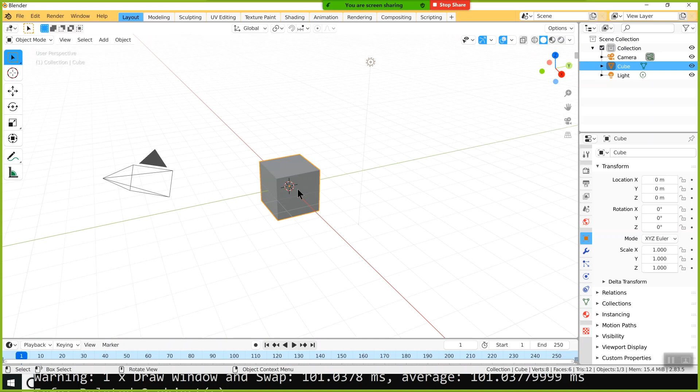Okay, so I got a cube here. I'm going to do an S for scale. Make it a little bigger that way. I'm going to scale along the y-axis. So I'll do S, Y. That way, viewport. Display as wire, so I can see through it. Okay. Now, I'll go to the physics. And this is the part that's changed a little bit.

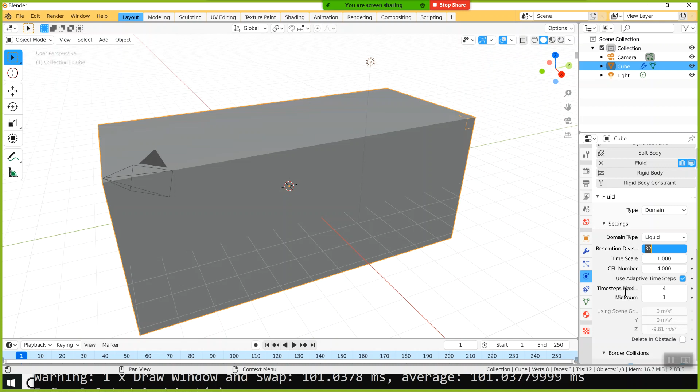Here I click fluid, and that'll add the fluid. And the type, I can do a drop down here. And you see I got domain, flow, effector. I'll choose domain. I'll change the domain type to liquid. And some of these resolutions, I'll talk about those. That make it look better, and so forth. Boy, I changed my viewport back.

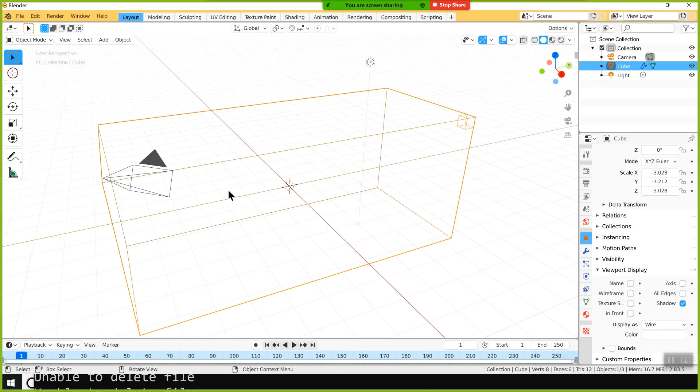Now, a domain is what's going to contain your water. So your animation is going along. Maybe the water is in an ocean. This would be the big box around the ocean. So your water wouldn't flow all over the place. You can think of it along those principles. Now within that, I need to have a water source. And so you add another object.

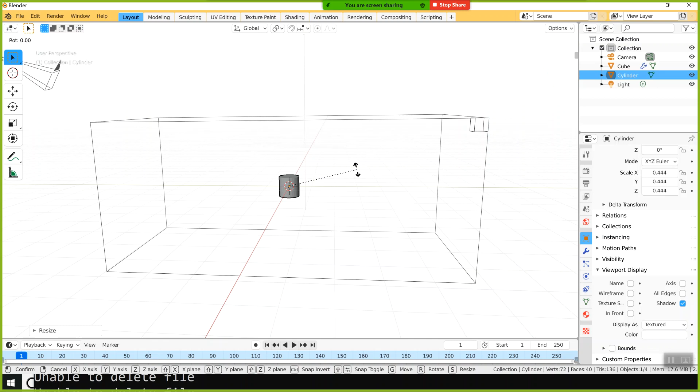Okay, cylinder, I guess. That's smaller. Rotated about the x-axis, I guess. So RX 90. Do a GY to move it along the y-axis. Do a GZ, move it along the z-axis. Okay.

And now if I go to the physics button here, if I choose fluid and choose type, see how there's a flow? This is water flowing in and water flowing out. Flow type, let's choose liquid again. If I choose flow behavior, see there's geometry, but there's inflow and outflow. I choose inflow. And this is where our water will flow in.

Now you have to tell where it's flowing in from. See the flow source, you can choose mesh or some other, no, there's only mesh. You can set your velocity.

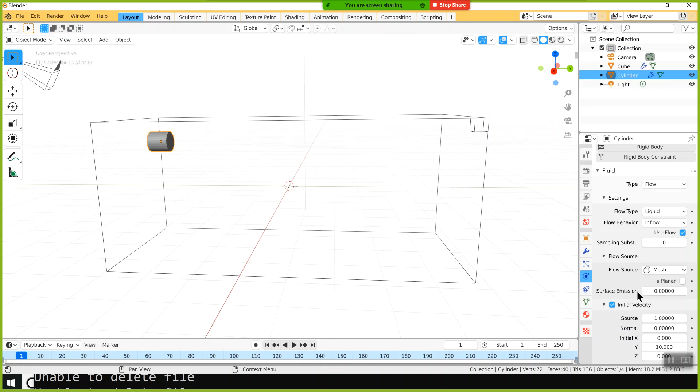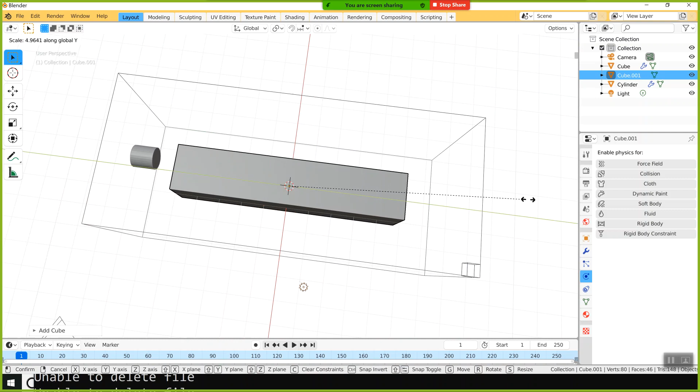Let's see, is outflow obstacle. Drop another cube in here. Add mesh cube. We'll do an SY, I guess. Change it on that. SX.

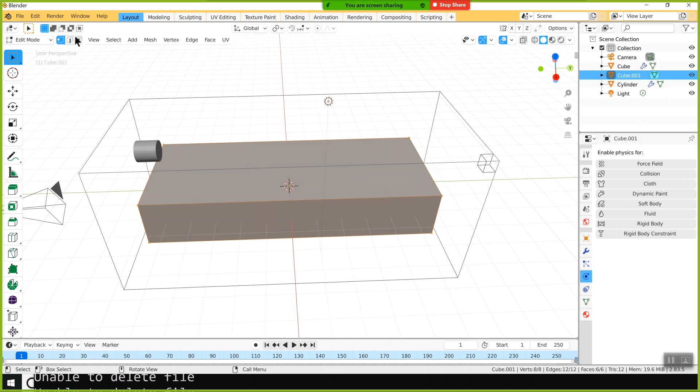Okay, and then I'll go into edit mode, choose face select, choose the top face and press delete, and choose which one? I think vertices. No, I was wrong. Control Z. Let's see. X. How about face? Okay, face.

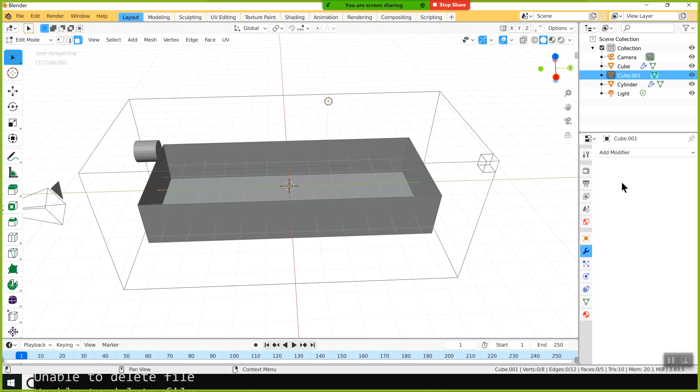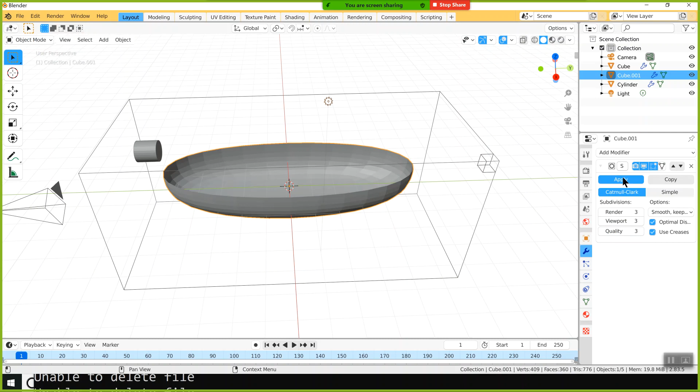Now there's a, and I talk about it in the video, there's an add modifier where you can do a which one? Subdivision surface, I believe. Maybe thinking of a different one, but that'd probably work. Then if I click apply here, yeah, maybe that'd be in object mode. Apply it. Do have to be in object mode. Okay, so I got that.

And then you go to your physics, and you choose your fluid and the type. This is where it's different than the video, which is why I wanted to show this. And let's see, effector, and it's going to be a collision. And then talks about different settings there.

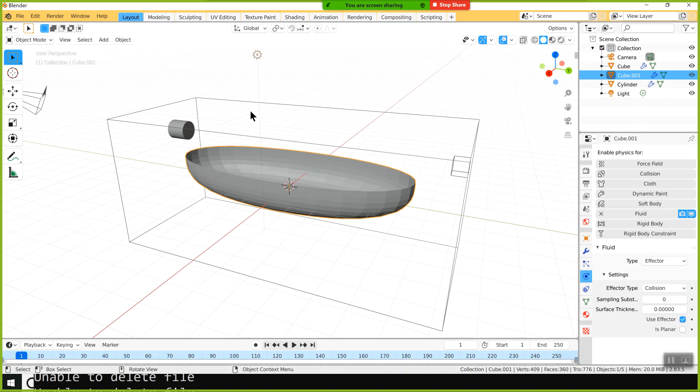At that point, you got to bake it, and it goes through all that. You got to bake it to get a decent look for your animation. And I may leave it up to you which one you want to do, because this individual has put these videos out there, some really good water animations out there.

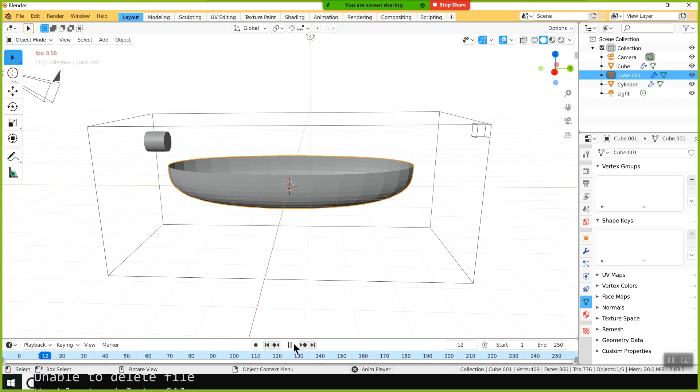Let's see if I remember where Bake's at. Doesn't feel like I'm gonna remember it, but there is a bake option, and the bake option allows you to kind of create the animation and apply all the rendering and so forth. I don't think if I click play here that it does anything. Well, there's other settings too. So I haven't showed you everything. But anyway, that's the basics of that.

You can do. They have one where a ball is falling into water, kind of splashing around. Let me see if I can locate that website just to show you. I got my PowerPoint somewhere. There it is.